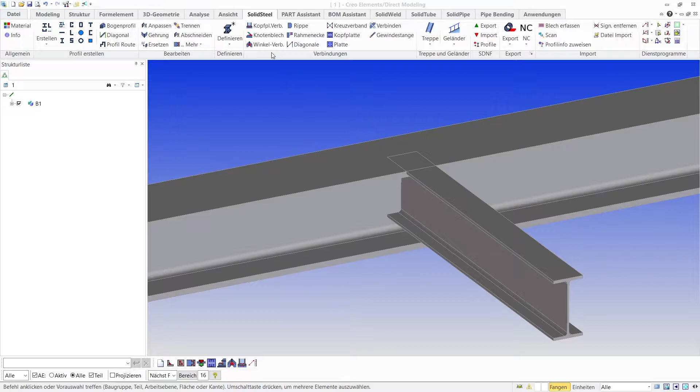Today's option 1: the double end plate connection. Here we use the end plate tool and select the beams to be connected. We get a message asking whether the overlapping part of the profile should be removed or only cut. In our case, remove is the right choice.

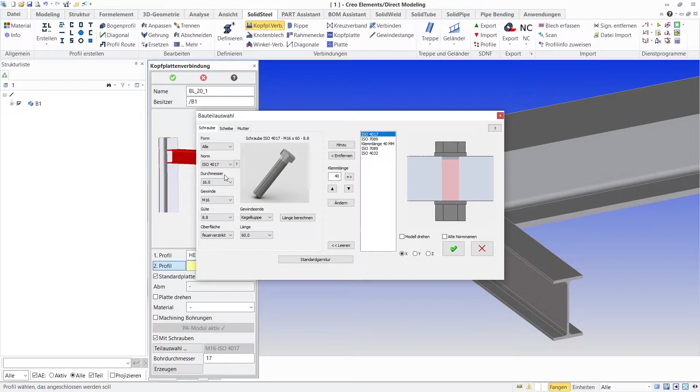Immediately after confirmation, the part selection opens, with which we can define the boltings exactly, because bolts was selected in the default settings. This option is only available if the part assistant is activated. Because SolidSteel always remembers the last setting used, the bolting fits here as well, so I don't have to set anything else. Washers and nuts are already selected, otherwise they would be added with a click on default mountings.

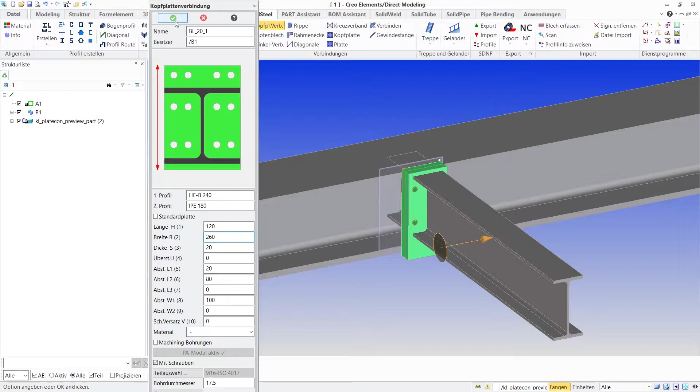After confirmation, we receive an advice that the bore holes are located outside the end plate or that they overlap. Here we simply confirm with OK, because the dimensions of the end plate will now be edited. As you can see, the holes are automatically adjusted as soon as the dimensions are changed. Confirm, and our end plate connection is finished.

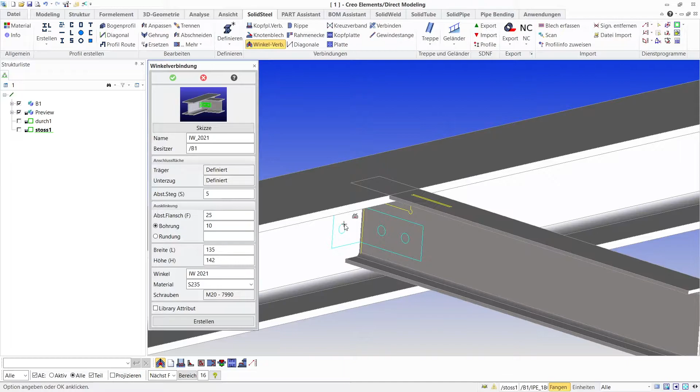We continue with the second option, the clip angle connection. Same situation as before. Here we use the clip angle connection tool, which performs 4 tasks at once for us: it creates a coping, bores the holes in the profiles, places the clip angles, and adds the screw connection. All in one step and controlled by a clearly arranged menu.

We only need to select the profiles, define the shape and spacing of the coping, choose the appropriate clip angle and the desired screws. Done. I think you can't get any faster than that.

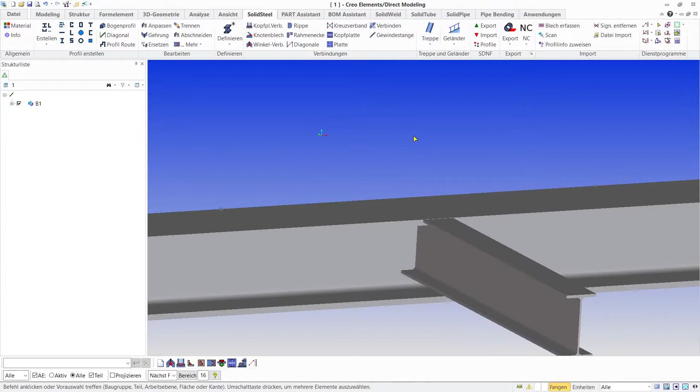Back at the start, here comes the third option: the connection with a small non-bending resistant end plate at the web of the beam. This time a coping is inserted first with the tool of the same name. The parameters are simply set as desired and then confirmed. Again, we use the end plate tool and define the target face by clicking on it.

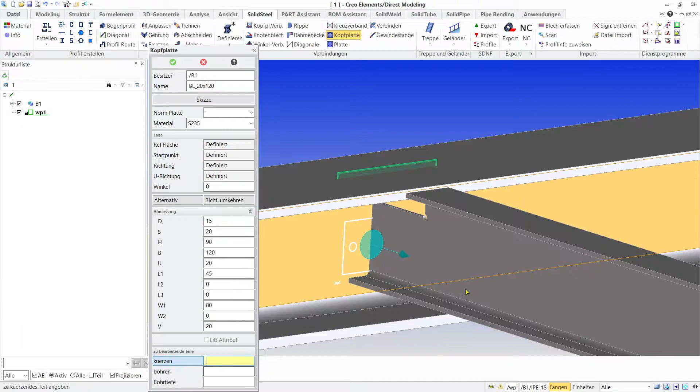The size can be adjusted here, but I think it fits that way. The last steps for adding the end plate are defining which profile is to be shortened and which one is to be bored. Both are done by simply clicking on profile and face. Confirm, and the end plate is in place.

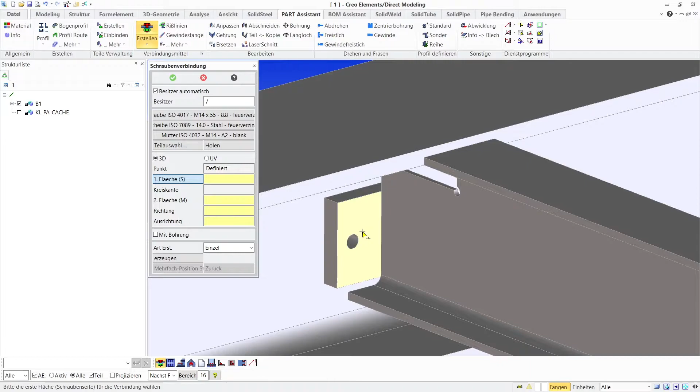Let's add some bolts. The bolting is added via the create tool in part assistant. In the upper part of the menu, the screw, washers and nut are set. We define the clamping length by clicking on the start and end faces of the hole. With this, the bolting is defined.

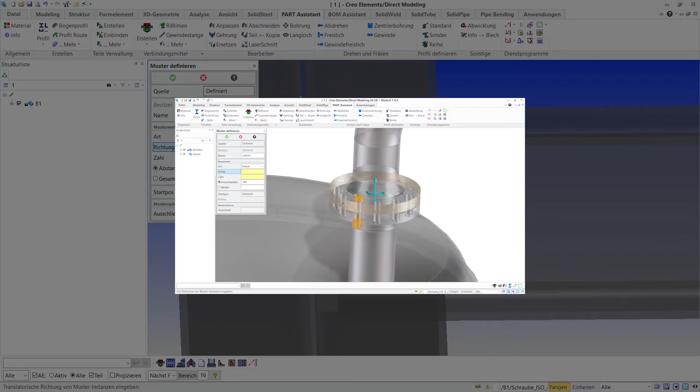We add the second screw via the pattern function, so I select linear here below. Patterning may be a bit overkill with only 2 screws, and it's probably even slower than simply placing a second screw. But you can see how fast this function is when using a large number of bolts in the video, creating pressure vessels, pipes and flanges. You'll find the link in the description.

We continue in the pattern menu, which opens automatically after confirming. Here we only have to define the direction, the number and the distance, and our clip angle connection is finished.

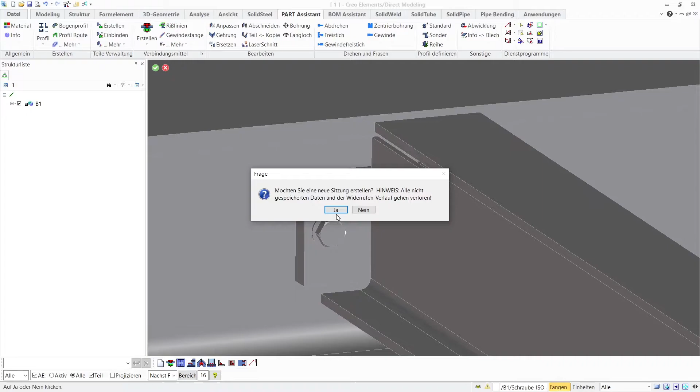Now we are already at the fourth and last example of this video. Let's weld the beams together. To do this we use Solid Weld, our solution for detailed welding seam design directly in the 3D model. But before we can weld, we cut the beam exactly to contour with the contour cutting tool. This works exactly as expected with a few clicks, and this is how the result looks.

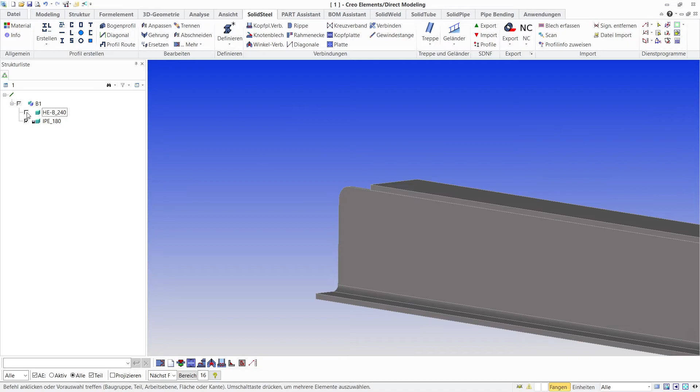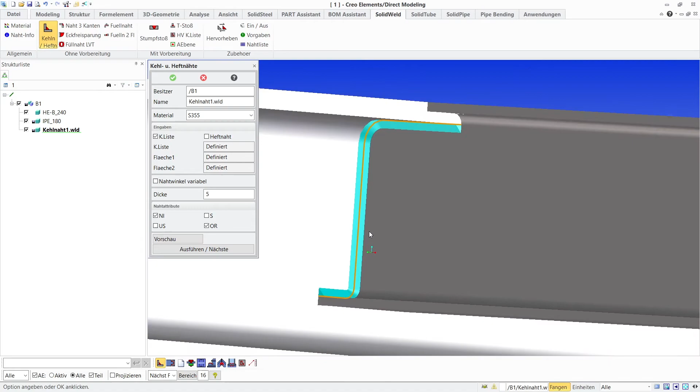Let's move to Solid Weld. Here we use the fillet and tack weld seams tool and activate the edge function at input. With this set for input, we can combine several edge segments into one continuous weld. Simply select one after the other, define the faces to be welded, and confirm. The preview shows us the weld seam, and if we like the preset thickness, we can confirm by clicking Execute Next and start defining the second weld.

By the way, the welds do not only look good, they are also inserted as a part in the model and can thus be used for calculations, with for example the FEM method.

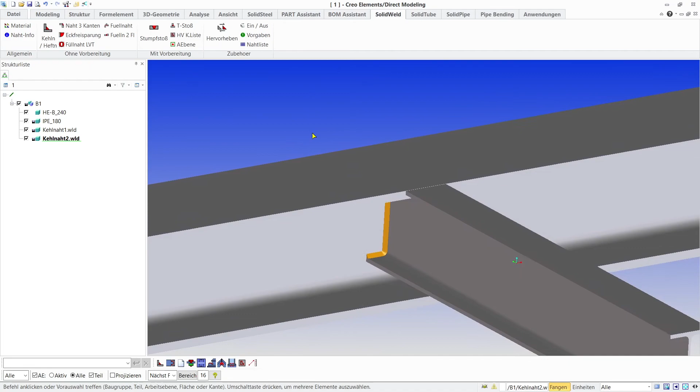That's it for today. 4 connections were shown, and you now know how easy they are to design with our Apps for Creo Elements Direct Modeling.